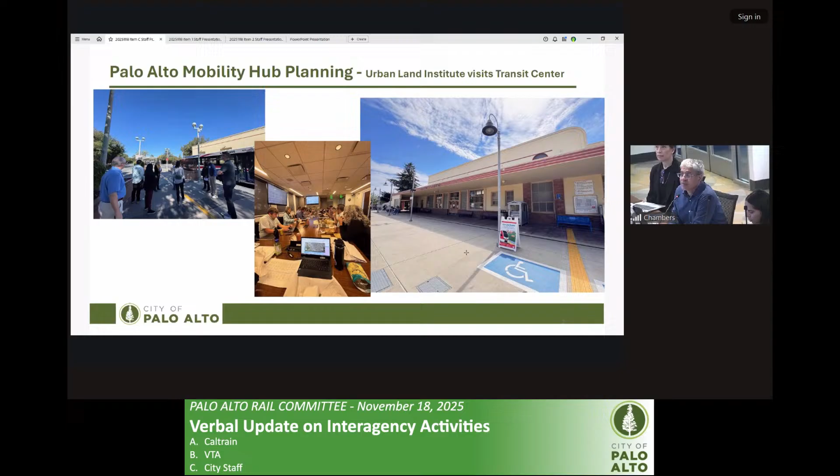Next slide please. The Bike and Pedestrian Transportation Plan update from 2012 is in progress. The draft bicycle and pedestrian plan has been in circulation and received comments from the community from October 3rd to November 14th. It also went through Planning and Transportation Commission review, and they unanimously recommended moving forward for adoption. The draft plan will be brought back to the City Council in a study session on December 1st for review and discussion, and following that direction, we'll look at adoption early next year.

Next slide please. For the Alma and Charleston Road safety improvements, Navi mentioned some near-term work. I'd call these midterm improvements, since we're looking at additional work at Alma and Charleston including traffic signal modification, a pre-signal, and signing and striping through the crossing. Staff is collaborating with Caltrain and Caltrans; it's a fully grant-funded project focused on safety and improving the intersection. Staff conducted a community meeting on October 28th and received comments, and we'll bring this project forward for the committee's review early next year before bringing it to the council for their review and recommendation.

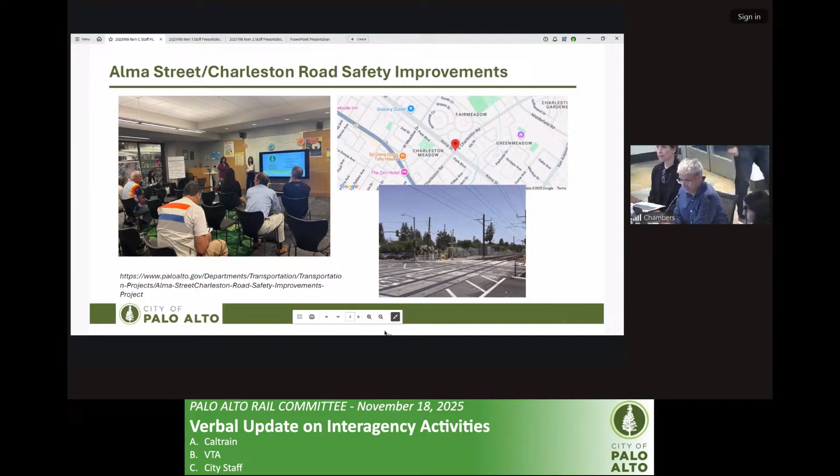Next slide please. Finally, on the quiet zone: construction of the improvements required for quiet zone installation at Palo Alto Avenue is in progress. We're hoping to get this construction completed by the end of this year or early next year. Following construction, we'll coordinate with CPUC and FRA for their final inspection before issuing the notice of establishment. We'll keep our committee updated — that's just at Palo Alto Avenue.

For Churchill, Meadow, and Charleston, we made a major milestone last week. On Monday, the council approved four-quadrant gate systems as a measure to implement quiet zone through Palo Alto at these crossings. So we'll be working with Caltrain on next steps in finalizing the design and construction methods for implementing quiet zone at these locations. We're already starting, and we'll also look at creating a capital improvement project for funding these improvements. I think that concludes my staff update.

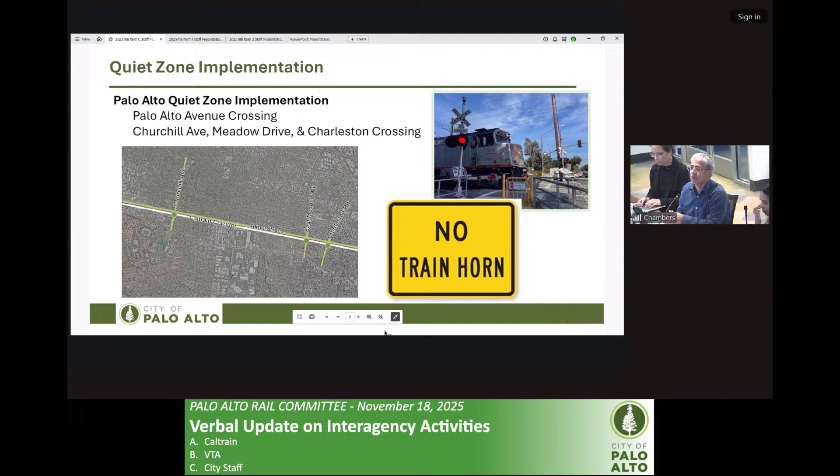Thank you. I did want to add one other thing on VTA, which is that the funding — as Navi said, the Caltrain board approved the funding for the safety improvements at Charleston and Meadow — but that funding actually came from VTA, and the Measure B that county voters supported in 2016. It's a portion of funds called the Caltrain Modernization Program. Our CEO at VTA provided that funding on an urgent basis, and our CEO at Caltrain has been a great supporter and driving force for the urgency of these measures too. So I just wanted to call them out.

Could I ask what portion, if any, of the costs for the... well, I wasn't talking about quiet zone, I was talking about the safety measures. Oh right, okay, sorry.

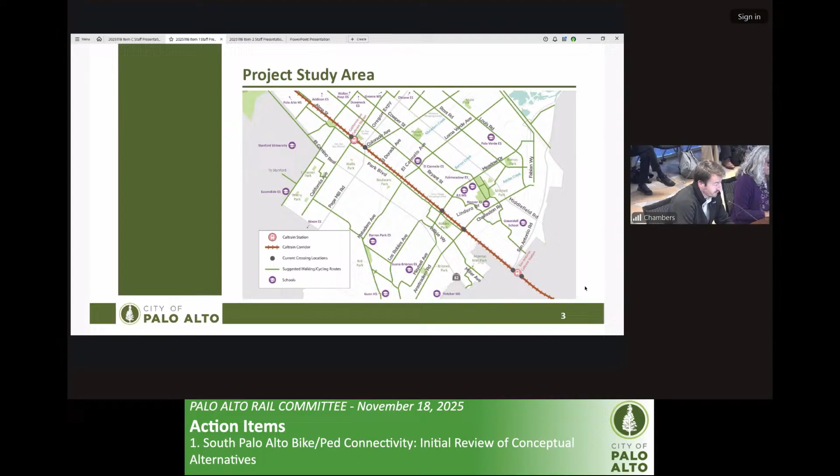I'll spend a bit of time on the project background slide to help provide a framework for why we're here. There have been several council-supported plans and studies that have identified the need for additional grade-separated bicycle and pedestrian crossings, particularly in the southern portion of the city. This comes up in our comprehensive plan.

It's shown in the 2012 Bicycle and Pedestrian Transportation Plan, our current BPTP. And even further, the 2012 BPTP recognizes the need for cross-barrier connections at the Matadero Creek location, a specific location along the corridor. This crossing was proposed to connect to Midtown through a future Matadero Creek trail.

This was taken a step further through the 2016 Midtown Connector Feasibility Study that you see on your screen, which evaluated the Midtown connection along Matadero Creek and showed 3 conceptual alignments for a rail crossing in the Matadero Creek vicinity: one at Matadero Creek, a second at El Carmelo Avenue, and a third at Loma Verde Avenue.

Just to go off on a tangent for a second, when you look at the specifics of those conceptual alignments, all of them included options that use portions of a city-owned Park Boulevard substation. Through this project, we met with the Utilities Department to review those alignments and discuss feasibility. Key takeaways were to ultimately avoid using the substation right-of-way, considering that this is a critical facility for the city. It would be difficult to move or consolidate equipment, and there was a need to preserve space for maintenance and future growth. I expected that question to come up, so I wanted to lay that out there up front.

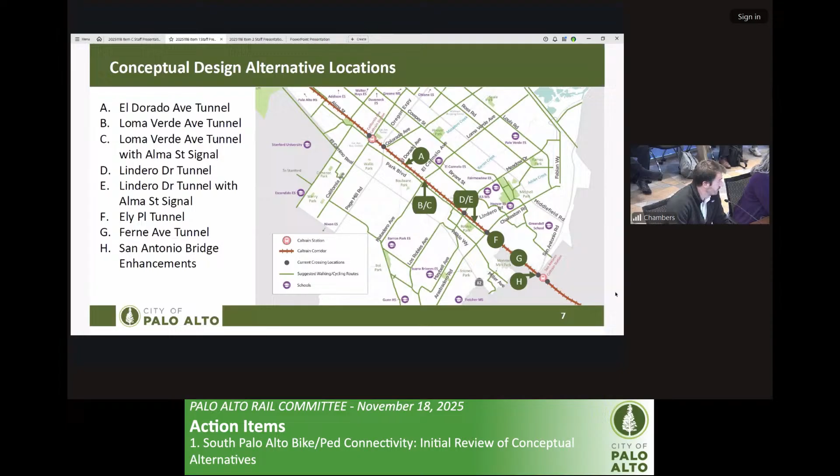Shown on your screen are the 8 preliminary concept designs. As a reminder, these designs are still very high level, very much flexible and modular in nature, so in a sense they can be moved up and down along the corridor where space allows. I also wanted to point out that these drawings are to scale, and they probably provide more detail than what's needed at this point. However, we wanted to make sure we included this level of detail so the community had a sense of what these could look like, how they might function, and how much space we would need to ultimately construct them.

You'll notice some locations have multiple concepts under consideration. This is due to crossing location priorities described in previous council-supported plans, as well as feedback gathered during the first phase of engagement. You'll also notice that many of these alternatives have a wavy path in at least one part of the design, and this is to accommodate a ramp and the ramp length needed to provide an accessible path between the tunnel and the street level.

Finally, you'll notice there are many consistencies between designs where we've proposed a new tunnel. The ramp widths, ramp grades, tunnel heights, and widths are all consistent amongst alternatives, and we intended this to help keep the conversation a bit simpler at this point.

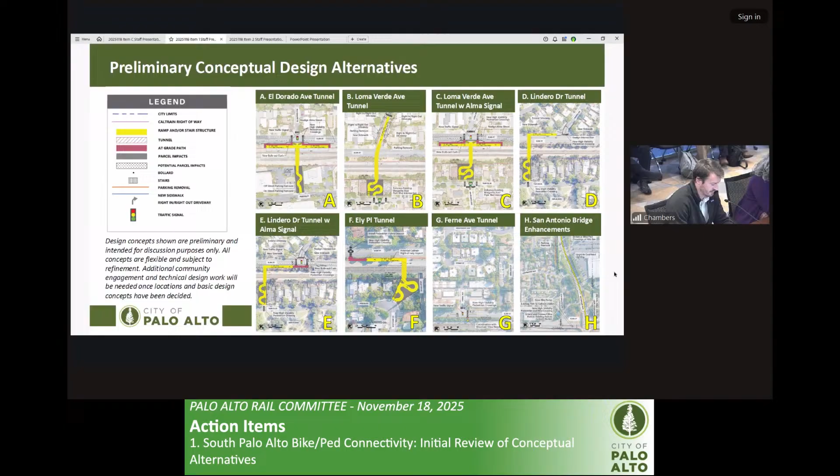As you're reviewing the conceptual designs, I'd recommend focusing your feedback on the bigger design concepts here, which is really location and what do we do at Alma Street. Do we build some kind of new signal for an at-grade crossing, or are we looking to do a full grade-separated tunnel underneath Alma Street as well? Hopefully that helps focus your attention, and I'm happy to walk through each of these alternatives a bit more if that's helpful. Next slide, please.

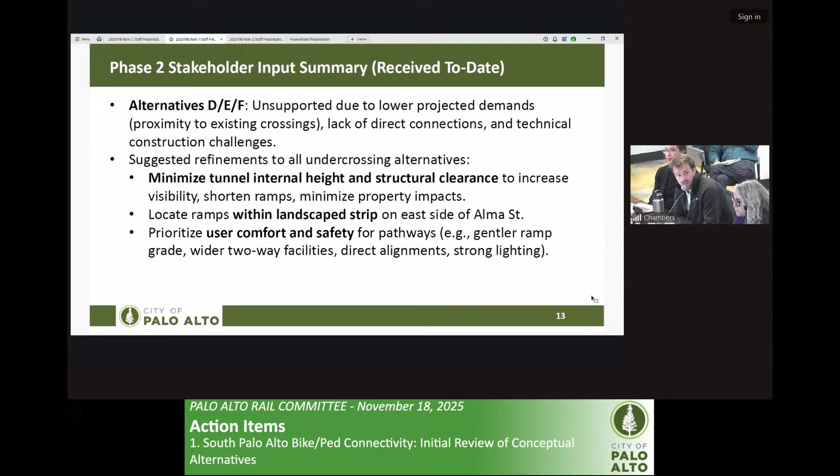My last slide is the same one presented earlier. Just as a quick recap, this completes staff's presentation. Looking forward to discussion and happy to take any questions. Thank you.

Great, thanks for that informative report.

One thing before discussion, I wanted to put on the table the relationship potentially between these alternatives and our next item on grade separations. The council has previously discussed the one area of Palo Alto with the longest distance without a grade crossing capability, and the prospect of sequencing this so we'd have a good pedestrian bike crossing prior to what might be a five-year vehicular construction crossing at Charleston and/or Meadow. So these two projects potentially relate to each other, and this one would potentially precede the other.

Any colleagues' questions? Yep, Julie?

Thank you so much, Charlie and team, for walking us through the complexity and intertwinedness over a number of years of this concept with so many other infrastructure and transportation projects in the city. Just a technical question, Charlie: you said the city asked the project to steer clear of the utility site on Park, and I wasn't clear which options, if any, are impacted by that, or if you're saying that's why we steered clear and why you're not seeing any that come through there. Is that it? Okay.

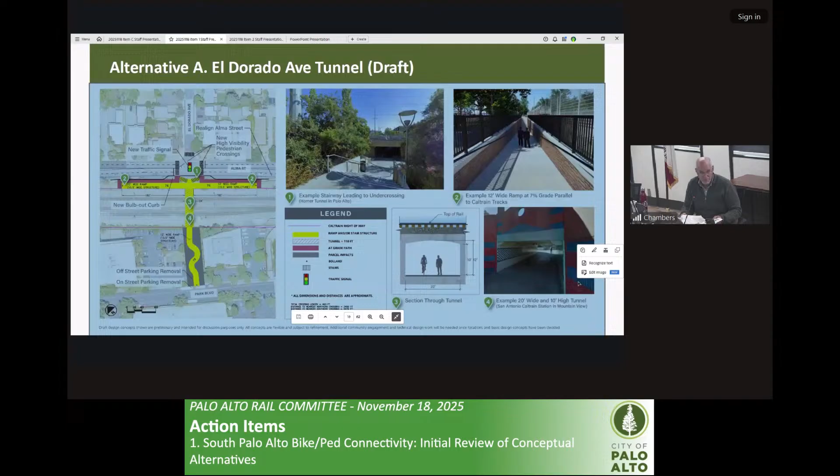On B and C, would we potentially go from, I think those are 2 properties on each of them, right? Would we potentially go to 1? I doubt that, because it's much more serpentine than A. So it goes back to this issue of, if on B and C, there's no way to get around 2 properties being impacted, it makes it highly unlikely that we'd be able to have a west side ramp with 2 willing sellers that we could find. And that really moves me to a much stronger inclination toward A.

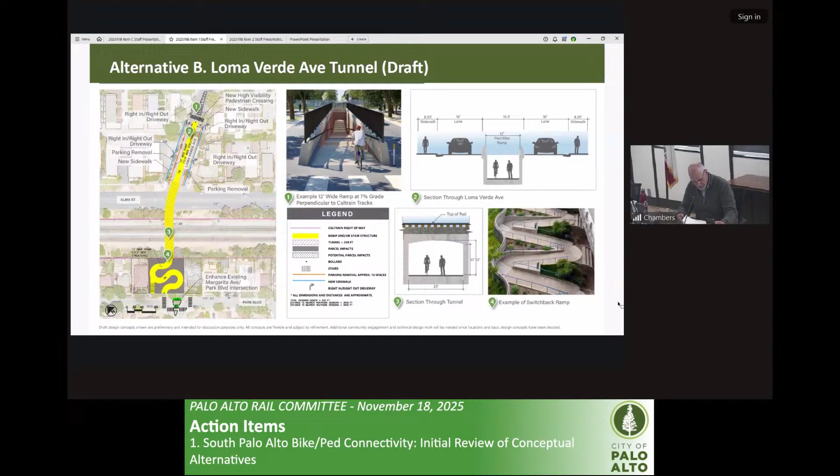I did want to note that just on the shading, the narrative on A said it's the lowest anticipated cost, but the shades had the construction cost as pretty high. Similarly, because this version only goes under the tracks, not under Alma, it has operation and maintenance costs pretty high, but the narrative says it's the shortest of the tunnel options. So I was assuming that would correlate to low operation and maintenance. So those are a couple just tweaks in where the shading didn't seem to correspond to the narrative.

As Charlie noted, these are preliminary conceptual, and they haven't gone forward even to 5% engineering, which is just conceptual. So just like we're going through on the vehicular ones, as we go forward with engineering, a lot of these problems may be able to be resolved through design improvements. But one of those, I think, as we go forward, the option of do we go under Alma or not is a big question. What slope we go with, or what are the options? So we look at trade-offs on slope rather than just picking one, that's another big question.

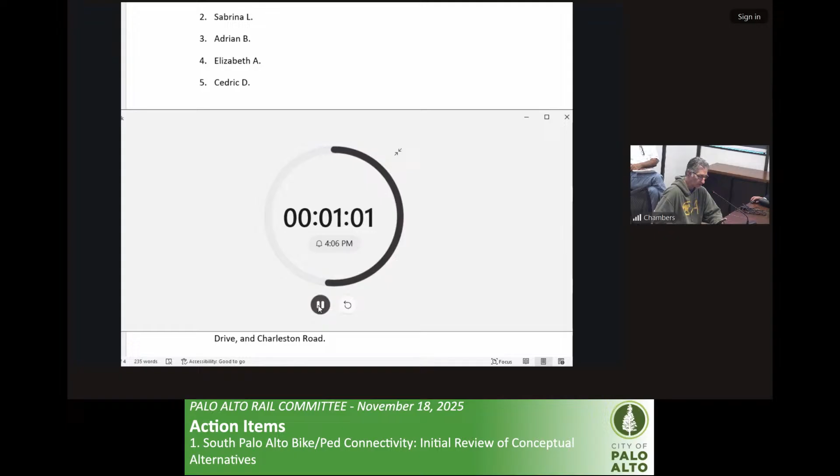Thank you, and thanks for some good comments. Just following up on those, I had neglected, when I was talking about the slope, to raise the issue of the vertical clearance, which also shortens the length of the underpass, and those two things combined may reduce this serpentine need.

Second, just on Cal Ave, we have had discussions for a number of years about the prospect of a signal at Cal Ave, and whether that, from a vehicular signal standpoint, and whether the pedestrian part of that would also just give access to the train station versus the underpass, or whether we would have at that location a separate underpass someday that retains the current one, and for a fraction of the cost just put one underpass for pedestrians and one for bikes. That remains to be determined. It's not before us today, but I just wanted to put that out there.

And then the issue of collaboration with both Stanford and Stanford Research Park and our school district, who has recently, after a number of years of not embracing our invitation to participate in this, come to recognize that this really does impact their school transportation, even their school boundaries. I really look forward to their participation. And that Cal Ave, or some other signal, maybe at the El Dorado location, adds another benefit, which is to calm the speeding traffic on Alma. It's a raceway from out in front of Grocery Outlet until no signal, until you get all the way down to Churchill. And that whole Oregon Expressway area is a pretty hazardous set of interchanges. So that would be another benefit to this.

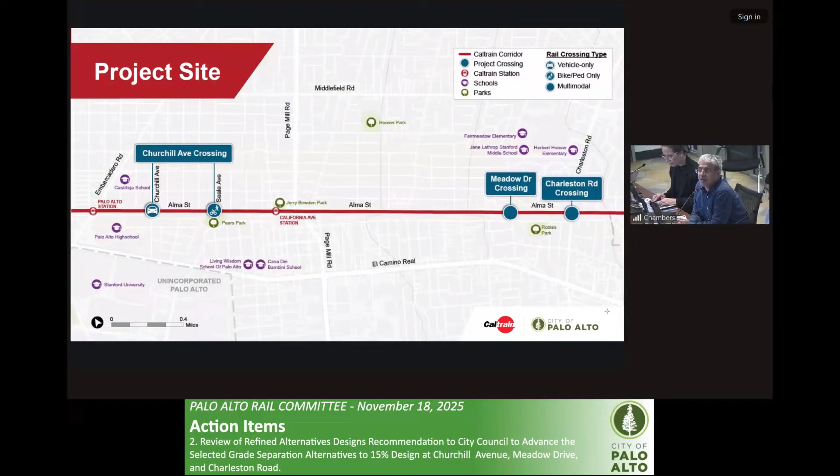I'll skip a few slides, let's go to slide number 6. The previous slides have been discussed previously several times at the public meetings as well as at the Rail Committee meetings. So in the interest of time, I'd like to note that we are at the end of the alternative refinement phase, and we'd like to seek a decision as we move forward with the 15% design.

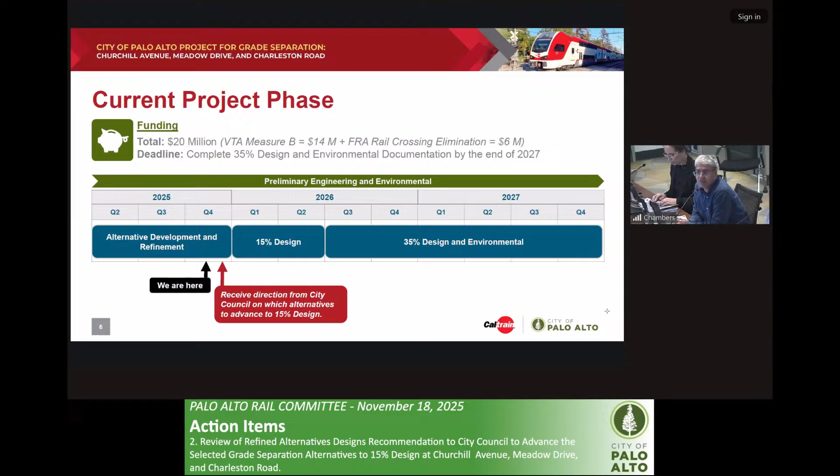As Ed noted earlier, we do have a council session scheduled on December 10th, and that will be a full council discussion. If we can have any input and direction on which alternatives to proceed with the 15% design, that will be much appreciated. I'll hand it over to Jill for sharing our community engagement efforts.

Thanks, Rippon. Good afternoon, Rail Committee, it's good to be back with you guys. So I'm going to start with a community engagement recap since we were last here. First, a little bit on our outreach: we used a lot of different channels, the city's social media, we worked through the Palo Alto Weekly, we sent just under 1,000 mailers out, blasts to the neighborhood associations, and physical lawn signs. Next slide, please.

So we did host 2 community meetings on the same day: 4 to 6 for the first one, 6 to 8 for the second one. It was well attended. We had over 100 participants.

Each meeting had its own presentation focused on Charleston Meadow, and then focused on Churchill and Seale. We had a presentation and then an interactive workshop portion, which the pictures show, really asking community members to roll up their sleeves and interact with the alternatives themselves, ask questions with the technical project team, and then provide their comments and questions physically on the map. So a lot of really good community dialogue. That was really helpful for the project team as we think about refining and advancing through the next phases. And so I think overall really positive.

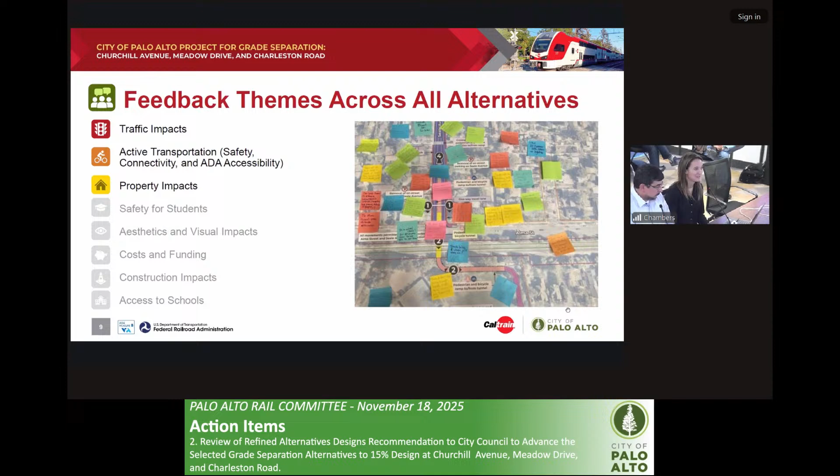And then the top 3 really were questions and comments and concerns around traffic, circulation, active transportation, and property impacts. And we're going to come back to these themes throughout this presentation.

So today we're seeking Rail Committee's recommendations for City Council on which concepts to move forward. And this is really a summary of the alternatives before we advance into discussion. So again, just to remind all of us in a bit of table setting, we're looking for recommendations on which configuration to advance, right?

Certainly throughout the design refinement process, we'll continue to collaborate with both the community and Rail Committee on the features and the elements. And ultimately, as we discussed at the last Rail Committee, we're really working towards setting an environmental footprint to study during the 35% environmental phase.

For your consideration today, really looking to narrow down, if possible, which concepts we move into 15%. And just a note, Chair Burt noted this earlier, that the funding environment for grade separations is quite challenging and continues to be challenging. Ripon noted that City Council has prioritized Meadow and Charleston over Churchill, and so potentially continuing discussions on the prioritization of which projects advance.

Next slide. So for this presentation, I wanted to describe the outline for both members of the public, in person and online, as well as the committee, on how we're going to work through each concept. First, Edgar's going to walk through the plan views, which we did at the last Rail Committee meeting, then show a rendering, talk through the rendering, and then talk through potential property impacts and the construction considerations as we know them today. We're still very early in the process.

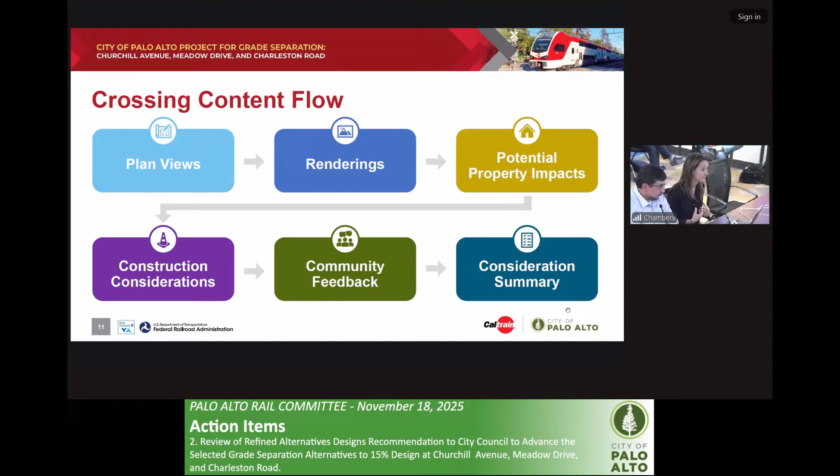Next slide. So based on the City Council's past direction, along with the direction from the Rail Committee feedback and the engagement themes that we've heard from our most recent community engagement and past engagement, throughout this presentation we're going to highlight the key technical considerations around each alternative: traffic and circulation, active transportation, potential property impacts, and construction considerations. So that's how we're organizing how we work through each concept.

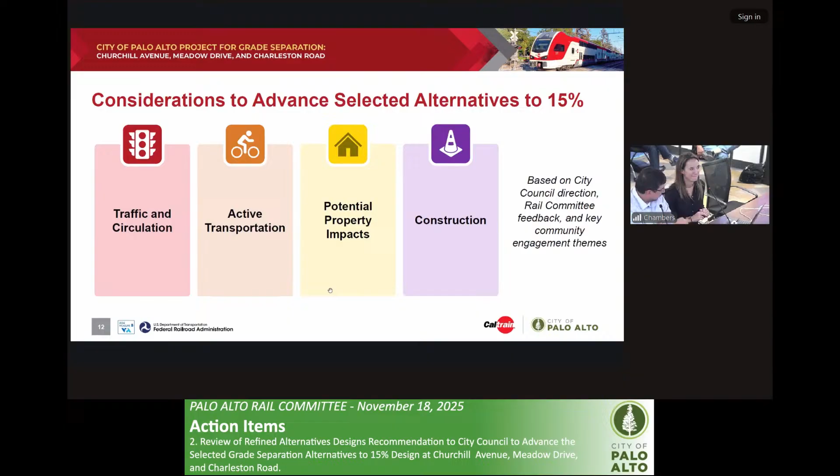Next slide. Did want to touch on costs. So previously the city did prepare preliminary construction cost estimates developed in 2020, and then most recently updated in 2024 that was shared with Rail Committee. And so wanted to have this as a reference, the left side as a reference for you all.

Some key considerations here is that these preliminary construction costs have not been vetted or validated by the integrated project team. One of the things that has been experienced recently with other projects, as they've gone to the industry to get market pricing or commercial pricing for those projects, is that they have come in substantially higher than previous estimates by project sponsors. As part of this integrated project team's commitment to the city and to the public, we're going to develop total delivery plus construction costs for the completion of the project that will be part of the 15% drawings. So we are currently assembling that team of former contractors that have the experience of delivering mega projects.

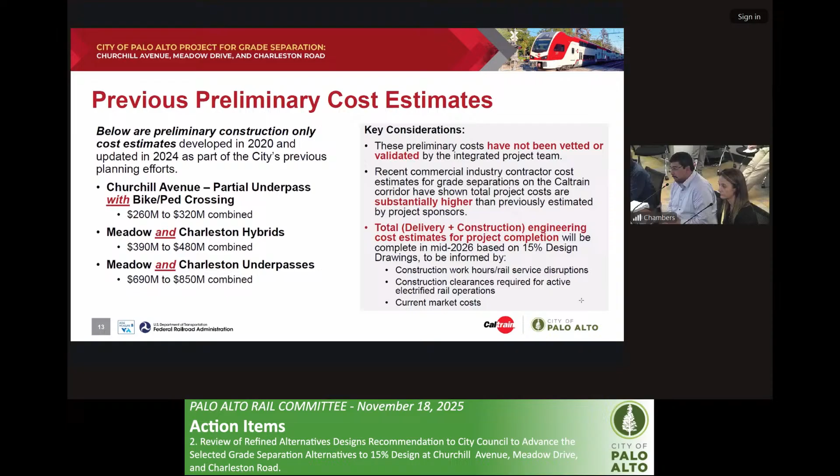Next slide, please. We'll quickly review some of the key elements of Churchill Avenue.

On the screen is the partial underpass showing the landscape strip, curb, and sidewalk. As previously described, this reduces Alma Street from 2 lanes northbound to 1 lane northbound on the upper portion, and then 1 lane northbound on the lower portion, still providing 2 lanes through while reducing that footprint with regards to the surrounding neighborhood.

On the next slide, you'll see the rendering of the partial underpass with the landscape strip. You'll see that green strip on the left-hand side. Again, that single lane both up above and down below.

And on the next slide, you'll see this case, the partial underpass without that landscape strip. So instead of having that small parkway between the sidewalk and the roadway, that has been removed. The sidewalk is immediately adjacent to the roadway, as it can be in many locations.

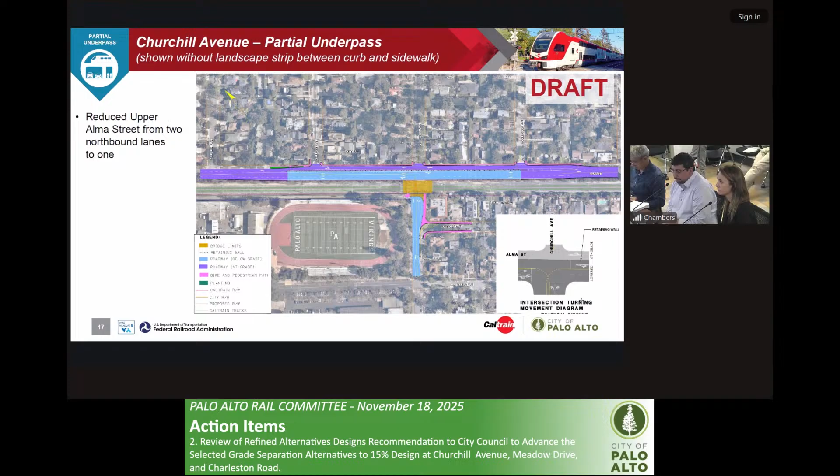This is the rendering here now with that sidewalk being shown. I will note that there is a buffer there. As we previously shared, we have been working with city staff as well as the fire department to ensure that fire apparatus can respond through and to the neighborhood. That is why you see the lane plus the buffer and then the sidewalk.

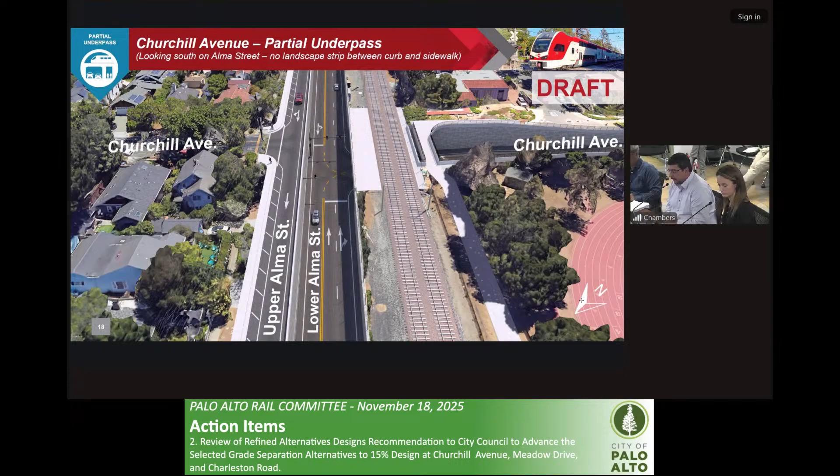With regards to potential property acquisition, being mindful that if property is needed, that is a real estate transaction. In this case, with the landscape strip on the left-hand side, 17 parcels and 29 dwelling units may be affected by that adjustment. These are a narrow strip of property necessary to provide that landscape strip. Without the landscape strip, there would be 7 parcels or potentially 8 dwelling units affected, mostly to be able to provide the ADA ramps at the intersections, at the corners. That is the distinction between the two concepts, with and without the landscape strip.

Can you shed a little light on how much property would be impacted approximately? Approximately 2 to 2.5 feet with the landscape strip. And then for the ADA ramps, that can vary, but it's small portions, a few feet here and there.

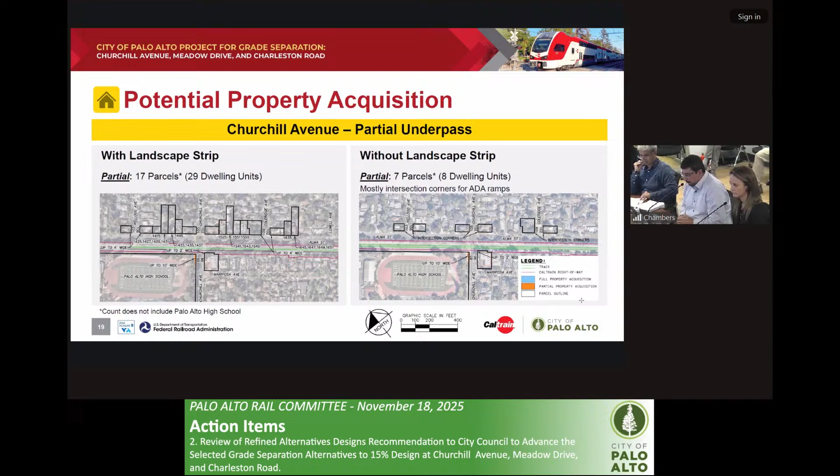With regards to construction considerations, applying to both Churchill Avenue with and without the landscape strip: the bike ped crossing would need to be built first in order to maintain access to Paly. The method of construction is yet to be determined, but we're proceeding with the assumption that it's a form of box jacking with no shoofly. There's still more work to be done regarding utility relocation, including potential undergrounding of the electrical on the east side of Alma Street, being mindful that those poles are there and can affect construction.

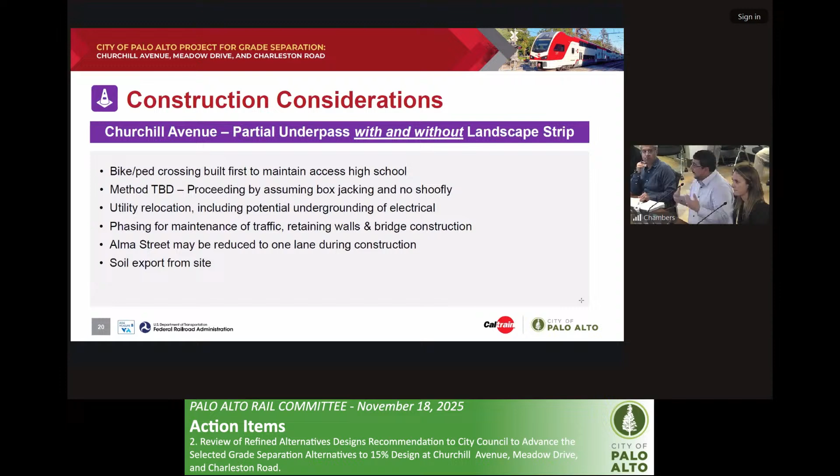Phasing for maintenance of traffic, the retaining walls, and the bridge construction, or in this case the box construction. And finally, being mindful that Alma Street may or likely would be reduced to 1 lane in each direction during construction. Because this site is being depressed, dirt is being removed and would need to be brought out or exported from the site, so that's truck traffic associated with that.

In terms of community feedback, to summarize: comments about the desire to prioritize student access and safety. Folks like the idea of a physical buffer along Alma Street to calm traffic, and there was a request across all alternatives to provide clarity on potential property impacts. We do have detailed maps in your packet, in the attachments, to be responsive and as clear as we can in terms of potential property impacts.

Next slide. Now we are transitioning to the bike ped crossing at Seale Avenue and Peers Park. There were 2 concepts presented to the public, or to the rail committee and then the public. One is along Seale Avenue, down the center of Seale Avenue, connecting to Stanford Avenue on the west side. This provides a tunnel underneath Alma Street and the rail crossing before coming back up on a ramp to grade for Park Boulevard.

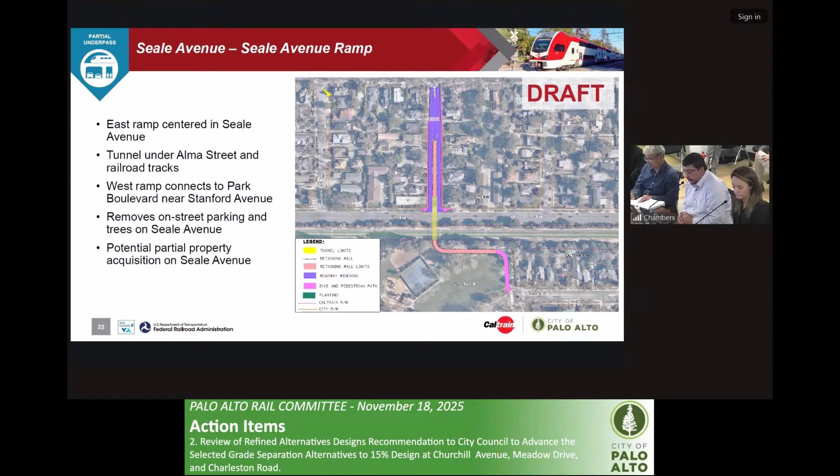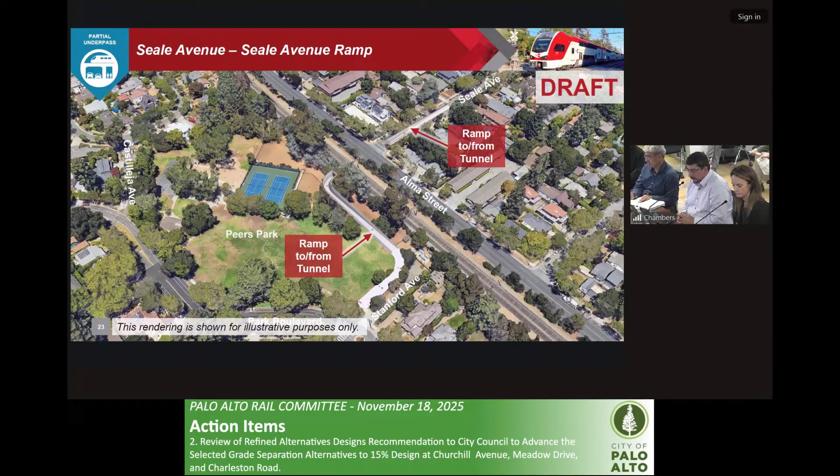On the next slide, you'll see the aerial or isometric view of this, showing the ramp going down the middle of Seale Avenue and then the ramp coming up on the east side of Peers Park before proceeding to Park Boulevard. This is a rendering view of the ramp going down the middle of Seale Avenue.

Please note that there would be parking being removed. There is slight widening of the roadway to be able to still provide access, both for fire access and vehicular access, and sidewalks on either side. Next slide.

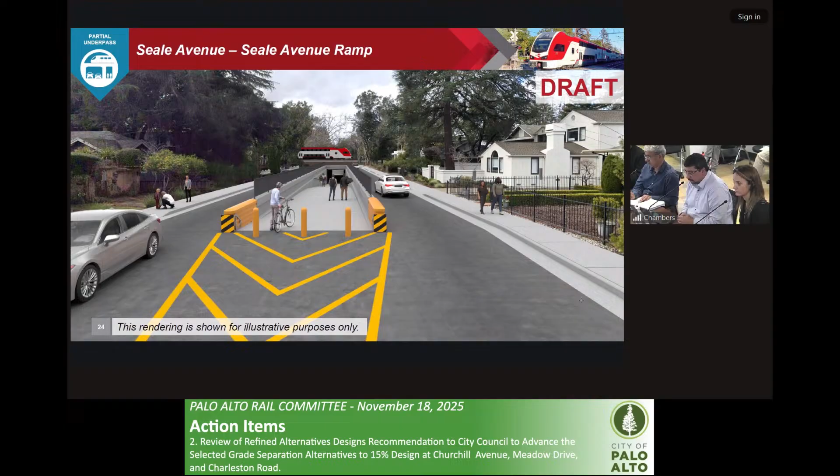Finally, the second option presented to the public and overall committee was the ramp along Alma Street. The ramp proceeds parallel to Alma Street on the east side before going underneath Alma and the railway crossing, connecting to Castilleja Avenue. This provides a closer connection to Paly and is less intrusive into the community, though it would still require some property, but not nearly as impactful as Seale Avenue, both to parking and neighborhood access.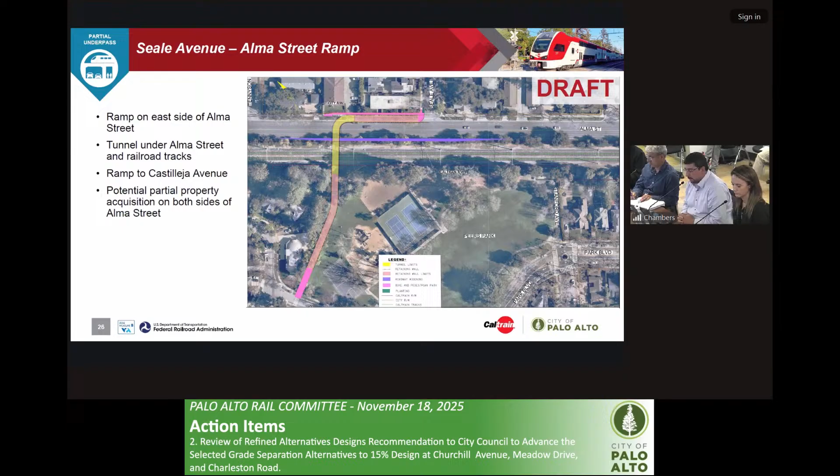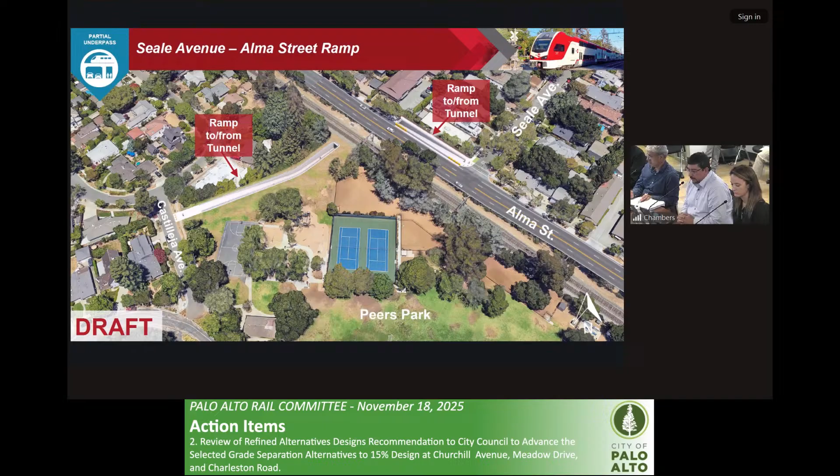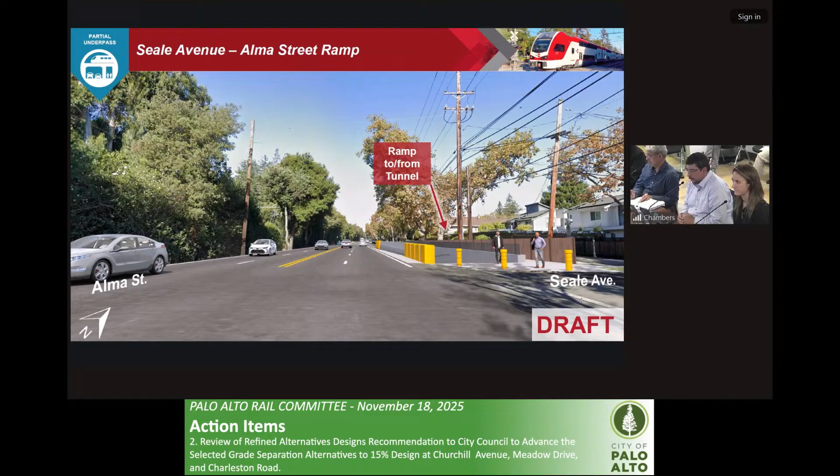This is a rendering view of that ramp and tunnel from Seale Avenue and Alma Street to Castilleja, followed by a ground plane view of that ramp at Seale Avenue, and then finally the ground plane view of the ramp at Castilleja.

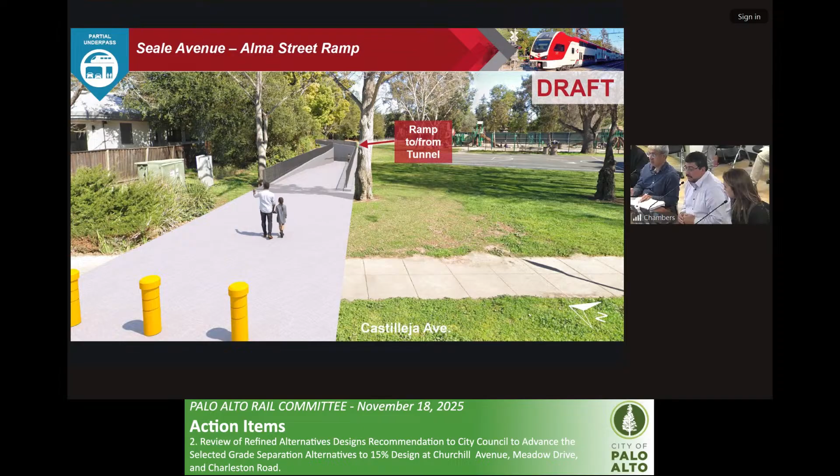Again, being able to provide ramps on either side. I'll note these ramps are at 8.1%. They require landings because they're greater than 5% grade, and that's what's being provided here. We are very constrained physically as to where we can conform or match the existing elevations, and that's what's being shown.

In terms of potential property acquisition between these two options, Seale Avenue shows 15 parcels with 28 dwelling units that could potentially be impacted, and it will remove on-street parking and some trees along that stretch of Seale Avenue. For the Alma Street ramp, there would be 4 parcels affected, 15 dwelling units, and this would again provide that closer connection to Pali along Castilleja.

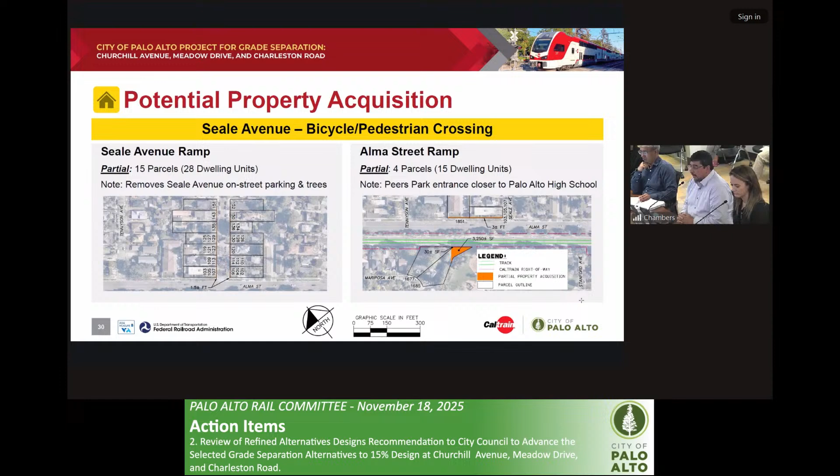In terms of construction considerations, with any undercrossing and subsurface work, utility relocations are a major component of that effort. Also, construction would likely take place from Peers Park towards Seale Avenue in order to push the box from one side to the other, to preserve as much as possible operations along Alma Street.

Either option will likely require some form of a sewer pump station to pump that sewage up to clear the tunnel and then come back down. The difference between these two in terms of construction: the Seale Avenue ramp would require disruption to home access and local access only. There would be substantial utility relocations because those utilities would need to run parallel to the ramp on both sides to provide service to homes, and it would likely further disrupt and change the dog park and remove large trees at Peers Park.

With regards to the Alma Street ramp, there would be potential lane closures on Alma Street, potentially even going to one lane in each direction to provide construction space for both the box and the tunnel, and disruption to relocate utilities when that box is being built to provide space for it.

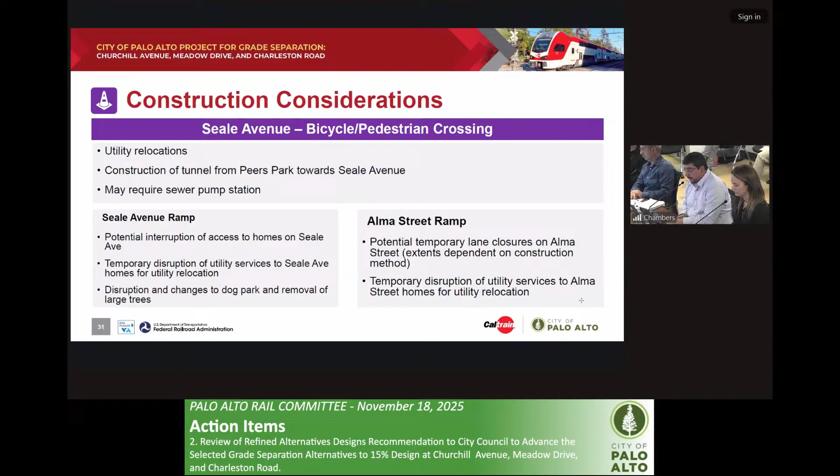In terms of community feedback on the Seale Avenue option: concerns for loss of on-street parking, comments on driveway conflicts, and concerns about tree removal, versus Alma Street where there's a more direct route to Pali and fewer impacts from a parking and property standpoint. Regarding both options, there was a desire to understand more on the user-specific context, interest in design treatments and landscape, and discussion around making sure students actually use the tunnel and not Churchill, given some folks' experience with California and Embarcadero facilities.

We'll leave this and come back to the end. We've got a summary of all the concepts at the end.

Let's proceed to Meadow and Charleston Road.

Excellent. Just a brief reminder here: in the past, what's been presented is both crossings being underpass, or both crossings being hybrid. As part of our work with the delivery team, we've been exploring the option of bifurcating or separating the two, such that Charleston or Meadow could be hybrid while the other is an underpass. We have validated that work, and we can state that one could be hybrid and one could be underpass, so wanted to remind the rail committee of that option.

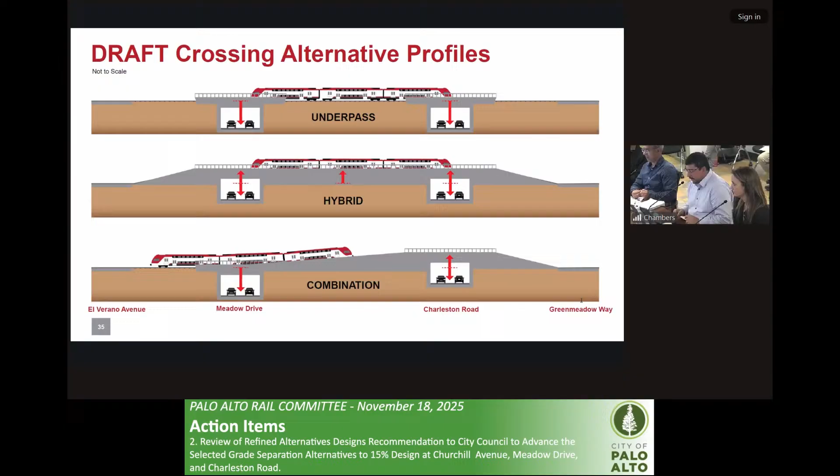I just want to note your cost slide did not presuppose that. That's correct, because the prior effort did not envision both being different types of separations. As part of our work, if that is something advanced, we would be able to price that for the committee.

With regards to the hybrid at Meadow Drive, just a brief reminder: the tracks would be raised 17 to 19 feet, the road lowered 4 to 6 feet. There would be dedicated left turn lanes along Meadow Drive and Alma Street, and the ability to provide enhanced bicycle facilities, whether that's queuing space, dedicated bike lanes, or protected bike facilities.

As part of this effort, as requested by Councilmember Lythcott-Haims, we explored wider bridges and more open space. We're disclosing that as the bridge gets wider, it could lead to partial acquisition of a property, shifting from no impact to properties to potentially one property. But those are design options that can be explored as part of subsequent efforts.

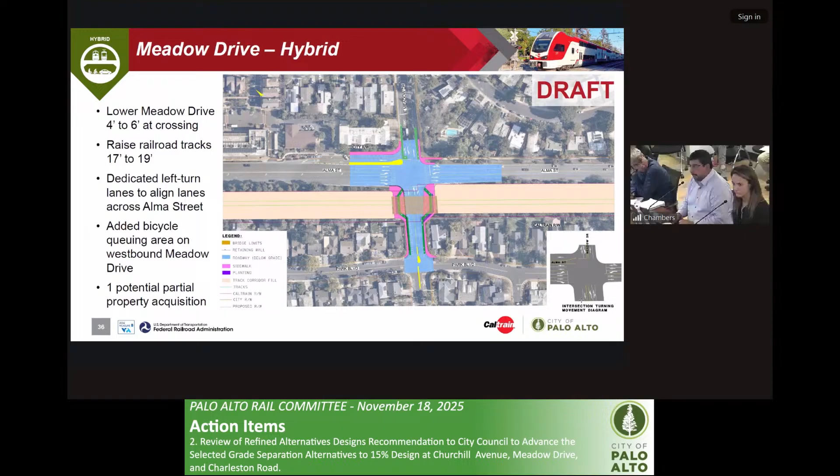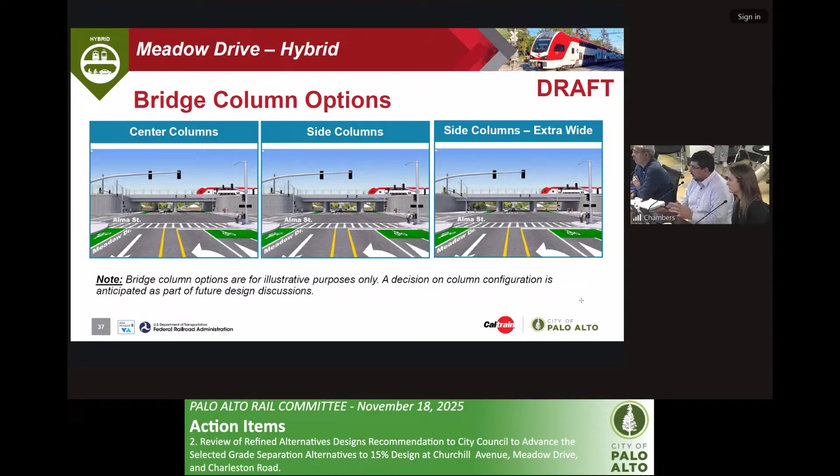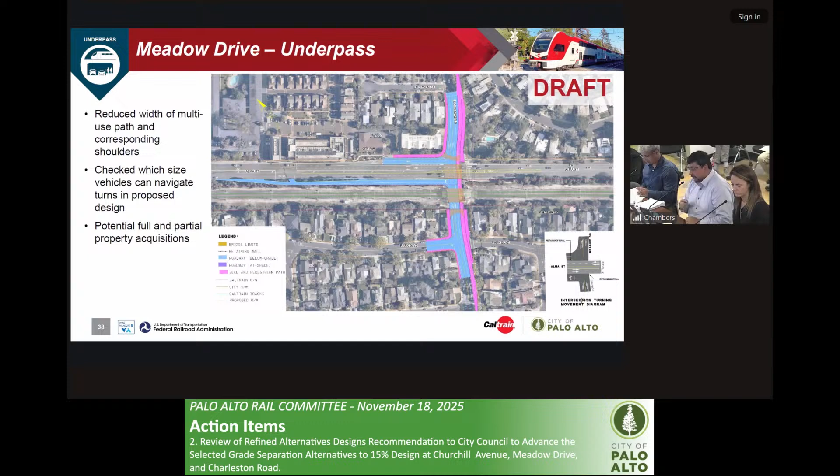With regards to the Meadow Underpass, we made adjustments to the multi-use path and the corresponding shoulder to narrow certain items up. We confirmed the ability to make certain turns, including U-turns as necessary, for at least passenger vehicles. For the underpass, there's the potential for full and partial property acquisitions. On the next slide you'll see a rendering of this concept, which has been shared both at rail committee and in public meetings.

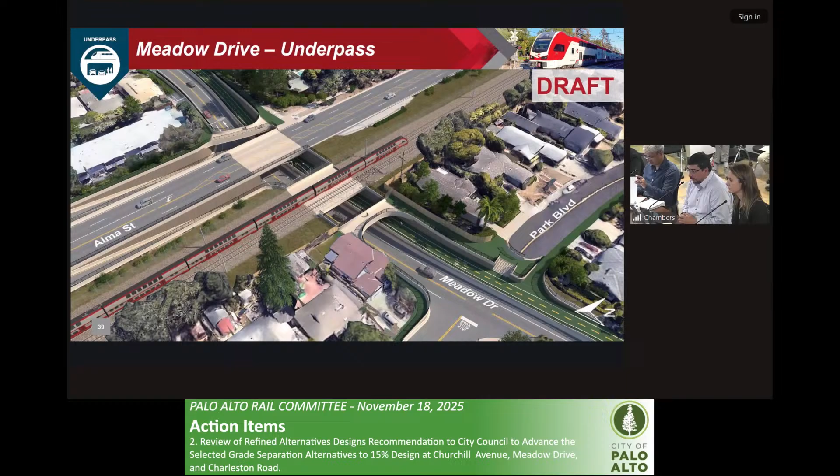For the potential property acquisition update: for the hybrid, if there were to be a wider bridge, depending on the width, there may be the need for a partial acquisition of almost 30 square feet of that backyard. For the underpass, there are at least 2 full acquisitions affecting 12 dwelling units, and 5 partial acquisitions.

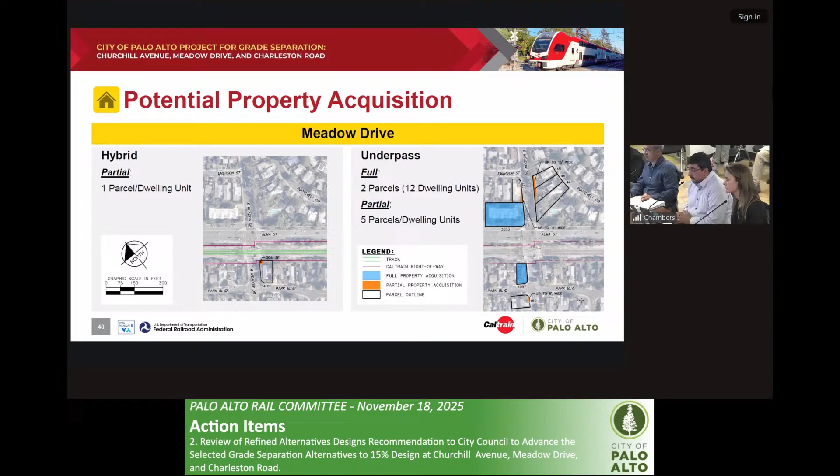For construction considerations, in both alternatives there will be temporary or full closure of Meadow Drive during construction, both at the crossing and potentially a segment of the road, to provide space for construction. Temporary lane closures on Alma Street would likely be needed, possibly for a prolonged period, depending on the construction method and how the box is constructed and pushed through, whether it's the underpass or a shoofly needed for the hybrid.

Utility relocations and temporary disruptions of utility service are a key factor in both alternatives, including a major sewer line relocation. In the case of the hybrid, a shoofly is anticipated because the tracks are being elevated—anytime you need to move the tracks up, a shoofly is necessary. There's potential for a phased approach to mitigate traffic impacts to Alma Street, which would need further exploration as part of 15% design.

There are fewer utility relocations and interruptions as part of the hybrid because the roadway is only being depressed 4 to 6 feet, versus a full depression as in the underpass. There is soil import into and out of the site. For the hybrid, because the tracks are going up, soil needs to be brought in that will be retained by the retaining walls.

For the underpass, we're currently assuming box jacking with no shoofly, though there may be the option of a shoofly depending on how the separations advance. There would be temporary closure of Park Boulevard at Meadow, and Alma Street may likely be reduced to 1 lane in each direction—that's the best case scenario, since bridges at Alma Street for the underpass would need to be constructed. More utility relocations and interruptions are expected as part of the underpass, including a sewer pump station to accommodate the sewer line that would need to go through the bridge. The phased work for retaining walls and bridges, long retaining wall systems, and substantive soil export from the site are all factors that would need to be considered.

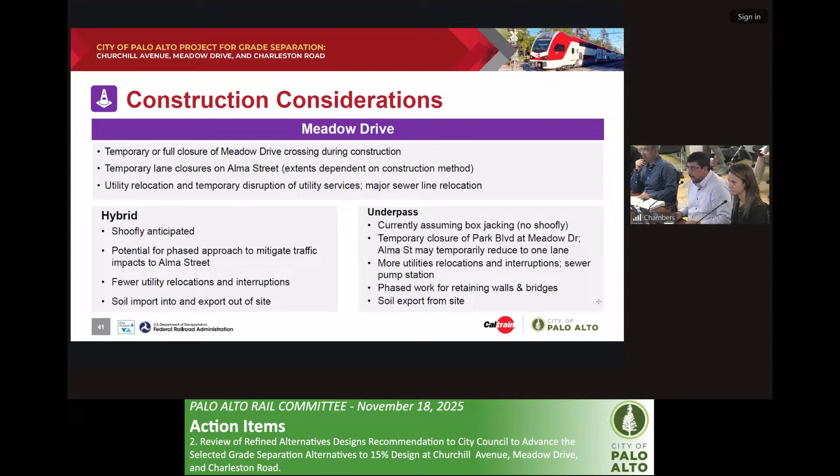And from a community feedback perspective, for both options, there was a strong desire to minimize property acquisitions, concerns over construction period impacts, noise, closures, disruptions, and a desire to avoid graffiti-prone concrete, and a lot of interest in landscaping.

In terms of each alternative, for hybrid, folks noted that it seems more comfortable from a walking and biking perspective, and there was interest in considering mixed wall and column treatments. From an underpass perspective, there were concerns about the grade, the ramps, the length of the ramps, and tight turning movements for wheels, both bikes and wheelchairs.

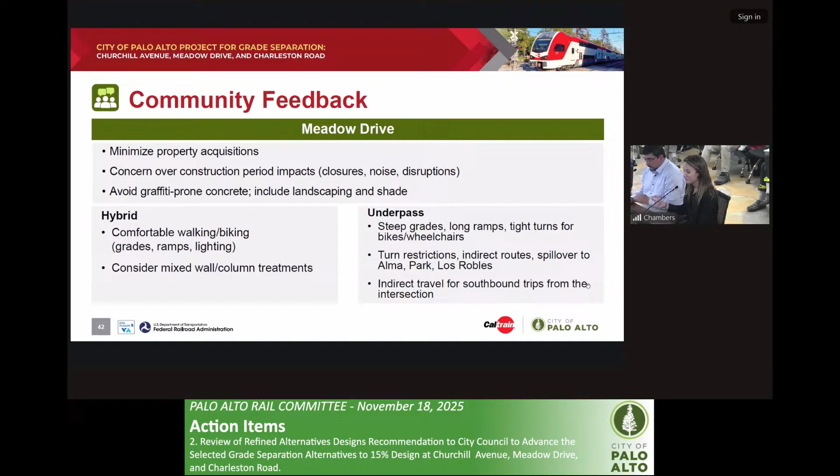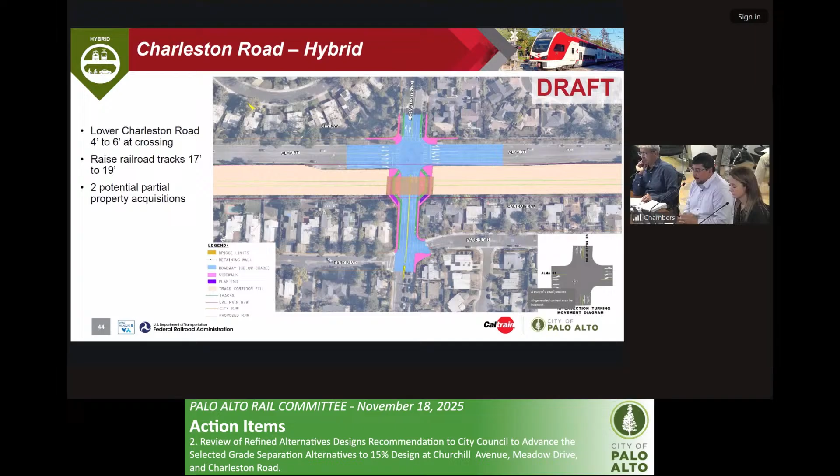Similar to Meadow Drive, in the hybrid, tracks are elevated and the road is depressed. In this case, similar to Meadow, we wanted to disclose that if a wider bridge is being considered, there may be the potential of two partial acquisitions in the corners of the back lots. Wanted to again disclose that may be a factor.

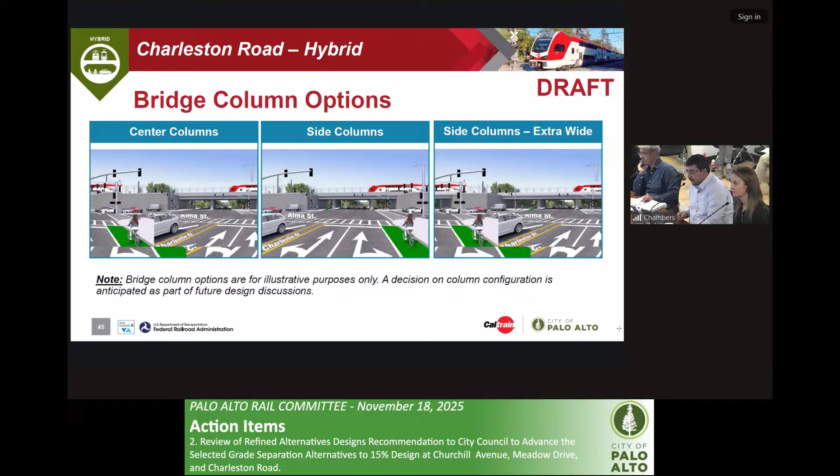Similar to Meadow, wanted to at least highlight the three options. There's one of the images—unfortunately we'll have that updated. There's the center column option, the side columns, and then side columns extra wide to be able to provide more space for pedestrians and cyclists underneath.

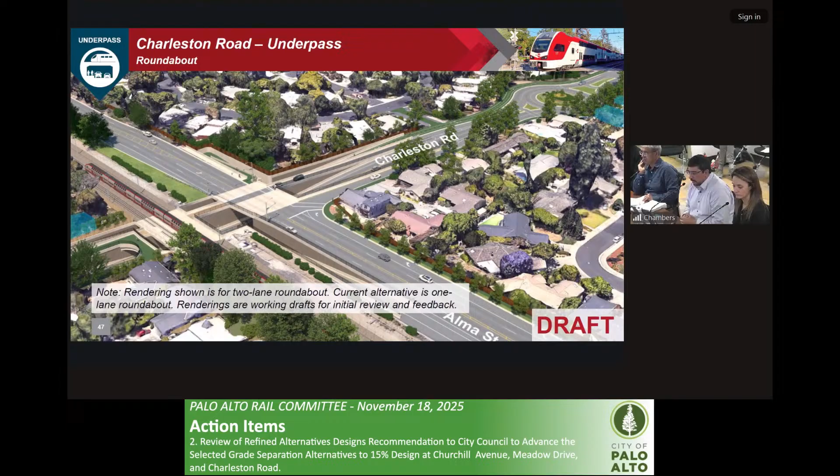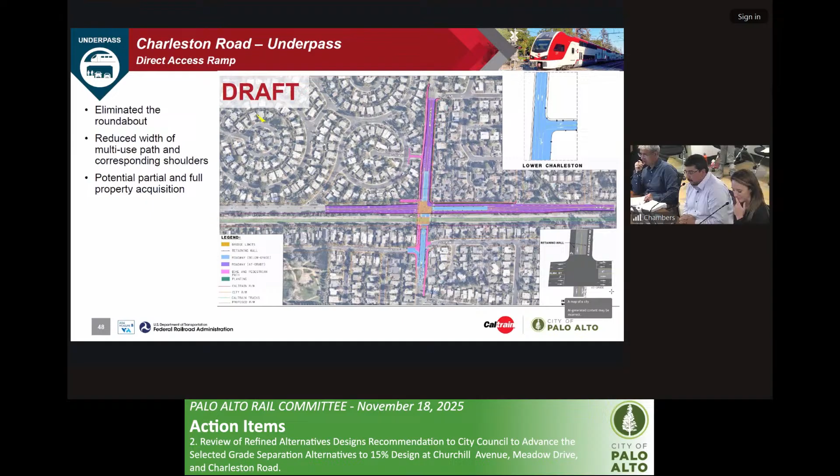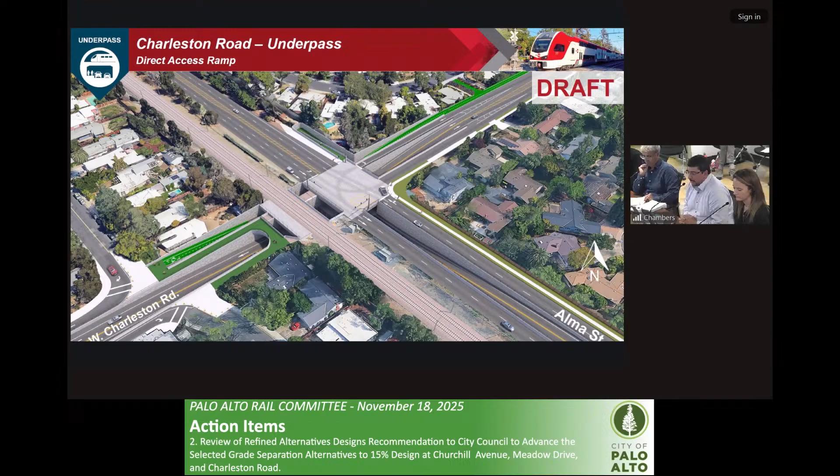While we're able to reduce the amount of potential property acquisition, there still is partial and full property acquisition for this alternative. The rendering here shows that ramp coming down from the bottom right side of the page, going down towards Charleston and that underpass. You can see the rail bridge and the Alma Street bridge—it's important to note that both bridges would have to be constructed in order for this underpass, or any underpass, to be successful.

So in terms of the potential property acquisition between the three options at Charleston Road: for hybrid, due to providing the option of a wider bridge, there is the potential of up to two partial corner acquisitions. For the underpass roundabout, there were three full acquisitions and dwellings, and then 26 potential partial acquisitions. That was reduced as part of the design to one full parcel acquisition and potentially up to 23 partial parcel acquisitions.

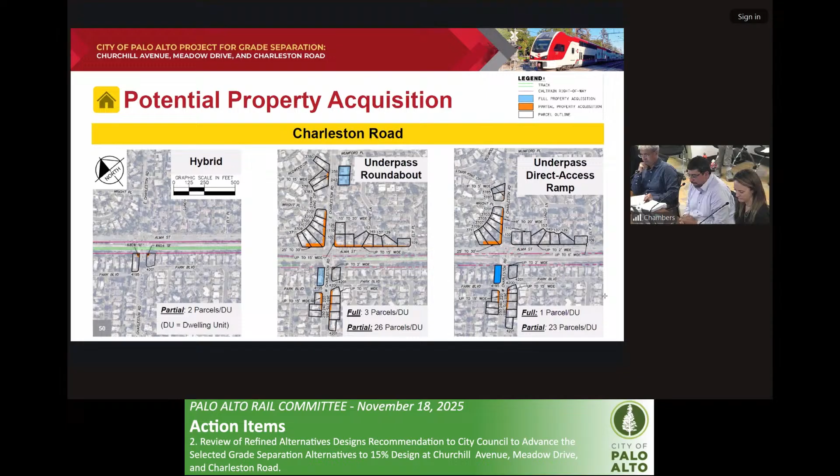For construction considerations, very similar to Meadow Drive, there would be temporary and full closure of the Charleston Road crossing during construction, as well as segments of Charleston Road itself. Temporary lane closures of Alma Street, with durations depending on construction method as previously mentioned. There are also substantive utility relocations and temporary disruptions, including the need to protect some major regional utility assets along Charleston Road.

For the hybrid option, a shoo-fly is anticipated. However, there would be fewer utility relocations and interruptions, along with both soil import and export. For the underpass, assuming box jacking and no shoo-fly, that could change depending on what combination of options are considered.

This would require temporary closure of local roads, potentially Alma Street down to one lane in each direction. The roundabout has more disruption to Charleston Road in order to construct it. The direct access ramp would have more disruption to Alma Street to construct that ramp down. The underpass inevitably would have more utility relocations and interruptions, and a sewer pump station to accommodate that sewer line, including phased work for retaining walls.

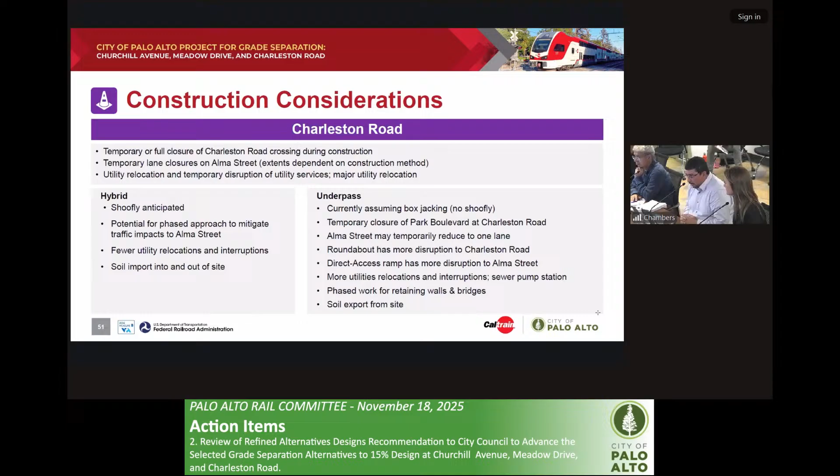And because it's depressed, deeper, and much larger in footprint, there's more soil export, or more trucks needed to export the soil out.

From a community perspective, folks noted that for hybrid, as Edgar noted, there are less property impacts. There's a note on maintaining neighborhood access and minimal traffic detours. Many comments offered ideas or suggestions for retaining wall enhancements and treatments. Folks also noted it's better for pedestrians and cyclists with safer or more direct crossings.

From an underpass perspective, there were definitely comments and concerns over the construction impacts. For the roundabout specifically, there were property impact concerns and perceptions of safety challenges. Folks noted the indirect travel, and the sentiment was definitely less favored versus the hybrid and the direct access ramp.

For the direct access ramp, there were mixed views on the roadway, pedestrian, and bike design. Folks noted the fewer property impacts and liked the better perceived traffic operations.

And then we'll, I think, come right back to this. Ripon, I think over to you.

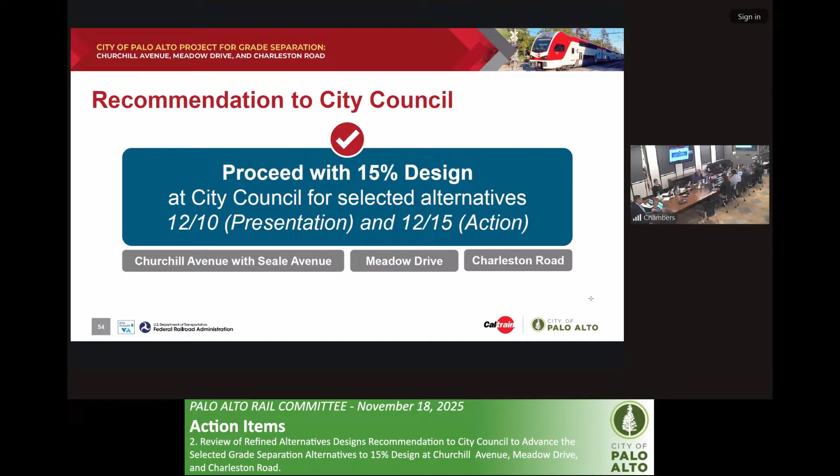So tonight we are seeking the Rail Committee's direction on which alternatives to proceed forward with, and considering we have very limited time, next slide please. We can show all these alternatives in consideration, and for viewing purposes, we have slides which also summarize all the impacts in the next few slides.

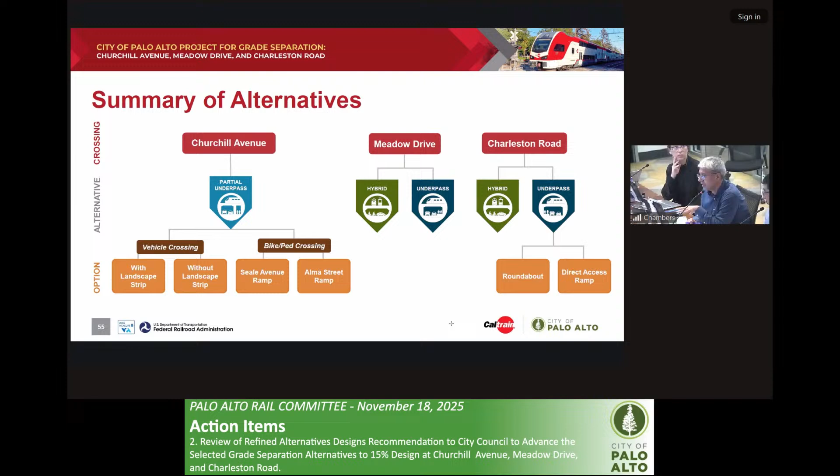Finally, we have a motion on the last slide that lists all the different alternatives in consideration, if there's any feedback on which ones to move forward. We'd also like to note that costs are increasing significantly, considering what we've experienced or learned from other communities proceeding with these projects. So further prioritization and narrowing might also be sought out from the council and rail committee.

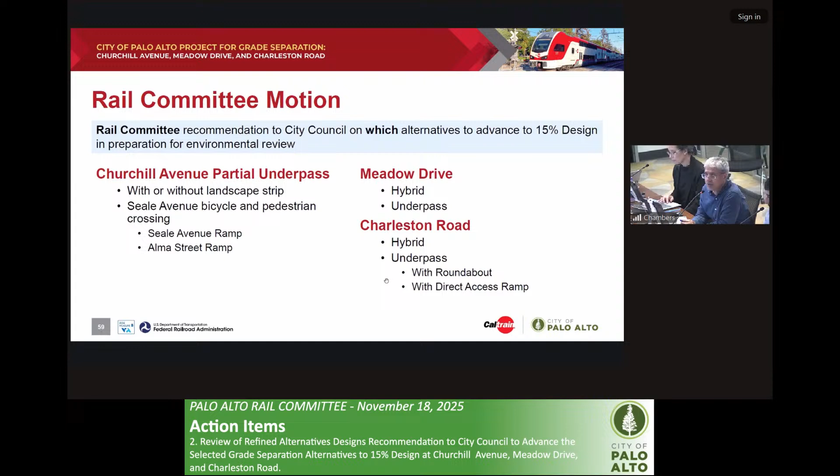Thanks. Thank you. If I might just share a couple things. One, following up on that last comment by Ripon, we've seen at Broadway Burlingame and Rengstorff drastic increases in costs in just the last three years on the estimates. On Broadway Burlingame, virtually a doubling. At Rengstorff, an additional 50%.

And basically what that is indicating is that the funding, and state and federal funding availability, looks less promising than it did a year ago. As a result,

we may be facing something that we haven't discussed until now, which is: we had prioritized Meadow and Charleston and said we may mothball Churchill for the indefinite future. But we may be looking at Charleston or Meadow, rather than Charleston and Meadow. And that's kind of a new discussion and consideration for us to begin to digest.

The other thing that has changed, which helps us in a way, is that up until COVID, we were looking at a significant increase in the number of trains and the number of cars from commuting. Both of those now are projected to be significantly lower than we were looking at, and the regional growth forecasts through 2060 have been revised downward very significantly. We will still have changes, our new housing element and whatever amount of housing actually gets built will be significant, but these are real changes that have reframed the context for this.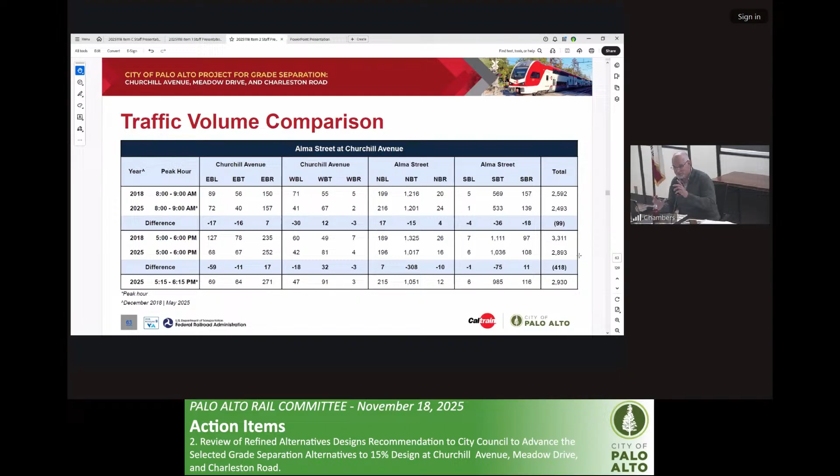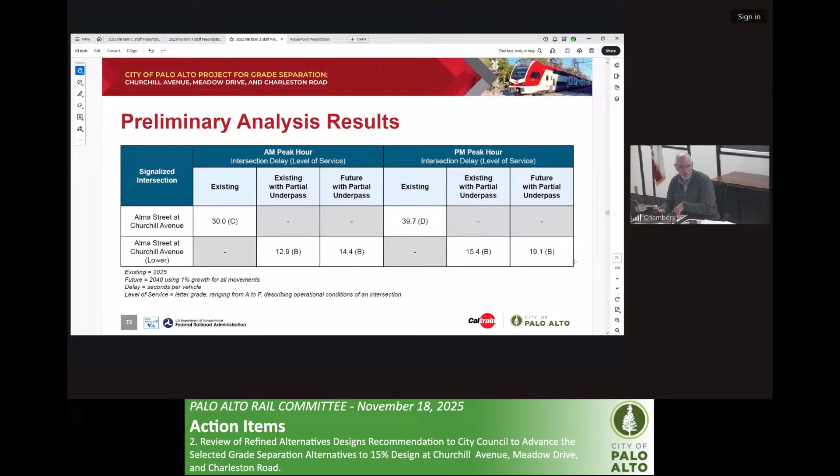We had those preliminary numbers with a big gap between the underpass and the hybrid. There's a lot of skepticism of whether that gap should be so large, but until we do what Edgar described, bringing in the cost estimators, using contractor expertise and not just designers, to estimate that. I can tell you from the BART tunnel, this is the right way to go: bring in the contractor expertise, because designers really don't have as deep an understanding of costs.

Okay, so this is something we really want to be understanding. Looking at this, on the screen you'll see the preliminary analysis for traffic operations in the AM and PM peak hours at Meadow Drive.

In the existing conditions, it's 42 seconds of average delay, unique in each approach. Some are much longer than others, as experienced by the driving public. For the hybrid, that average delay gets reduced to about 40 seconds. Think about being able to move the same amount of traffic with less average delay. In fact, in this case, the distribution of the extremes gets reduced.

And that's because you remove the uncertainty associated with the rail crossings, the train passing by. The underpass does provide a better operational experience in terms of average delay that a typical user experiences at the intersection. But it does come with the caveat that there are fewer movements available to the public with the underpasses, because of how the underpasses are configured.

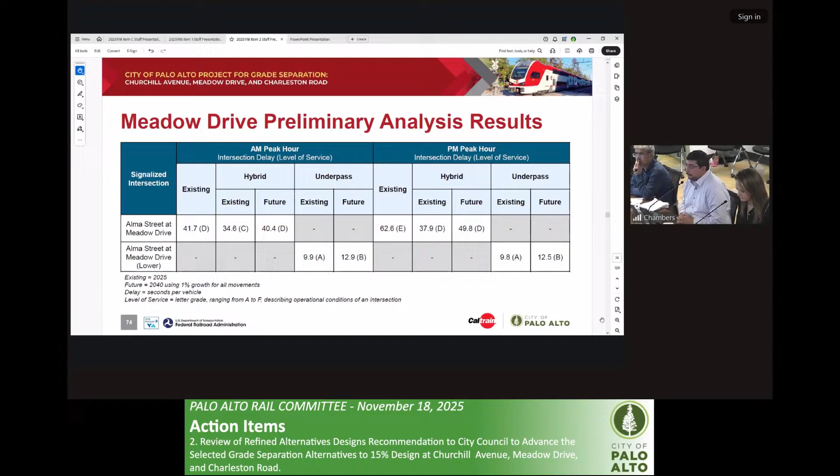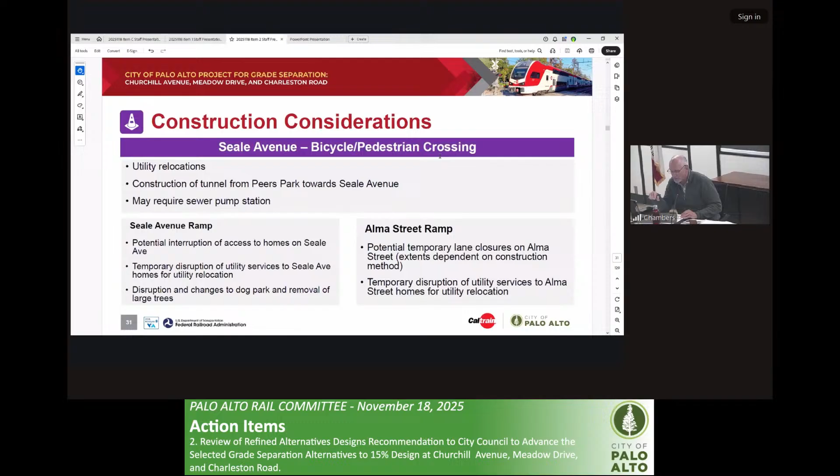So before we have other questions from the public, can we have slide 10 come back? Just to potentially accelerate whether we can make recommendations today. From what we've heard, I'd be interested in hearing from colleagues.

Whether at Churchill we would be willing to eliminate further consideration of the Seale ramp and eliminate consideration of the landscape strip. And at Charleston, whether we would want to focus on the direct access version of the underpass and not continue evaluation of the roundabout. To me, those are the things we might be able to make recommendations on today.

I am with you, Chair Burt. I do want to note, I just made eye contact with the clerk—there are 9 people wanting to speak in public comment. I have some other thoughts to share, but given where we are, I like that direction.

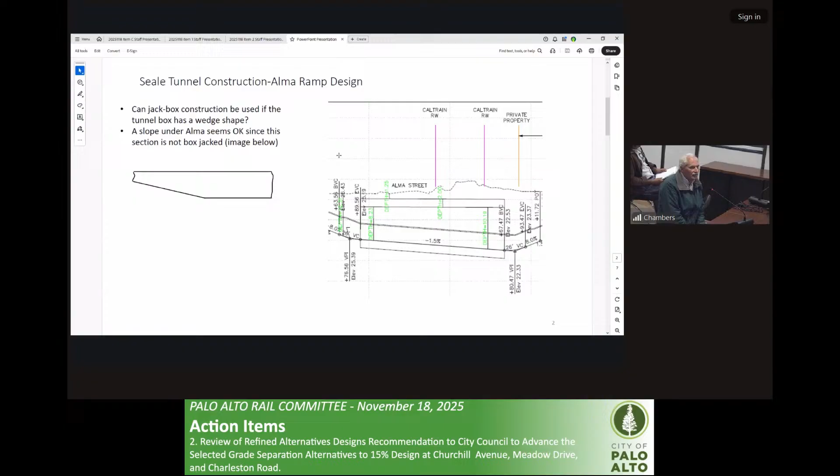Although I prefer the other option, the Seale tunnel—if you provided the road, used the utility road, you could save part of the park land. Next slide.

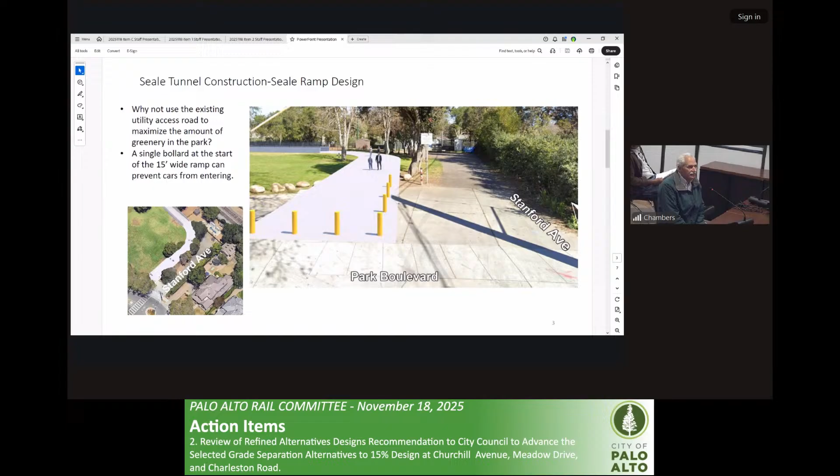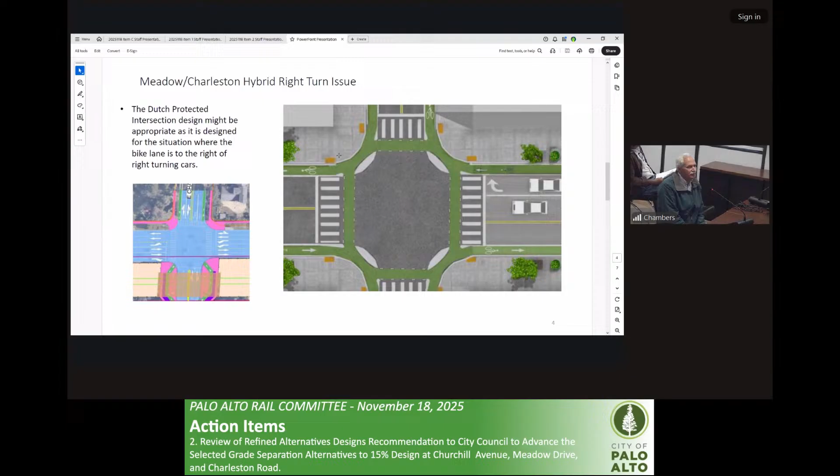In that situation, you've got turning cars to the left of the bicycles. The Dutch intersection design is made to deal with that, so that might be something that should be considered.

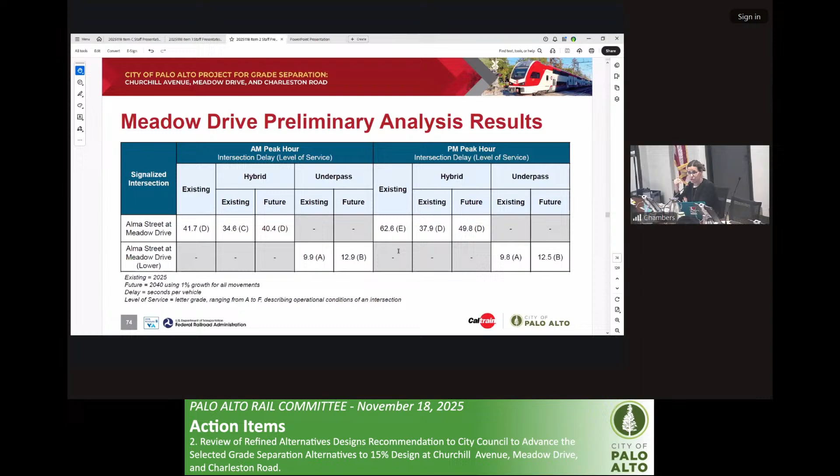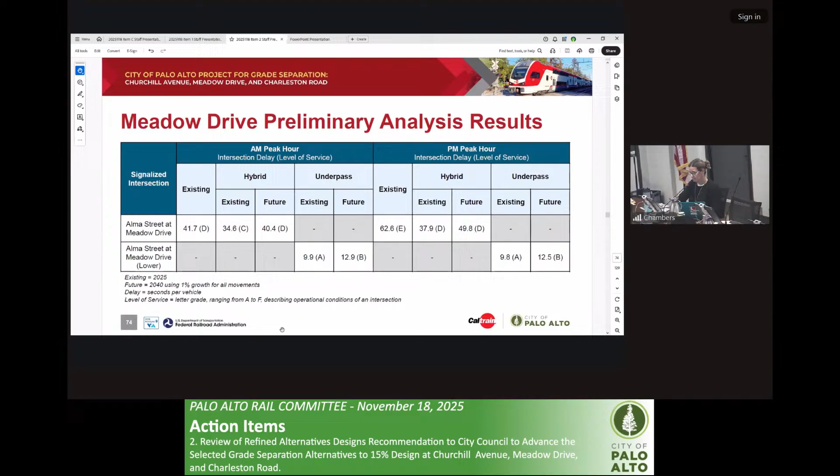I was just going to reiterate what you're saying. For going to council, I think it's really important that the traffic slide that was in the backups moves to the front. At the end of the day, we're spending on the largest infrastructure project we might be building in modern history, and presumably it's to leave the community in a better state. If you don't understand that the underpass has such a difference from the hybrid, it doesn't all look the same when we're talking about the whole transportation benefit to the network. I want to push that forward next time—that consideration has generally been ranked by councils going back years as the number one consideration, but we kind of buried the lead.

Let me ask, with just a couple minutes, if we could decide on this. First, do we want to advance Churchill to the 15% engineering so that when we park it, mothball it, we'll have a better understanding of what we've been able to mitigate and what we cannot? And do we want to eliminate the seal ramp at this point in time, and the landscape strip, for purposes of going forward?

So are you favoring? I agree, I'm agreeing with what you said, to drop the landscape strip. We could drop it at this point because I don't think it makes a big difference.